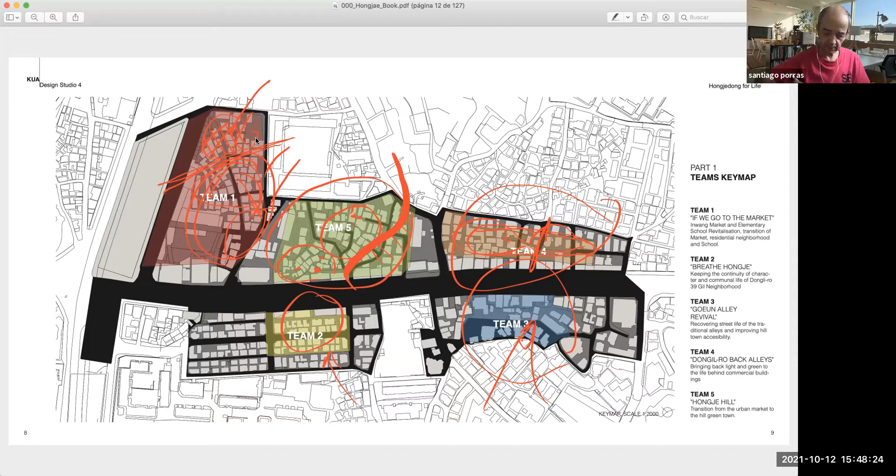And of course, Eugene did very nice work, all in very different styles, right? So I will go first with team 5. I will show you what Seri, Dasol, and Jimin — I think it was Jimin — did in the midterm. You have the result in the book, but you don't have what they did at midterm, so that will help give you more context.

So I will stop sharing this. I will go to Safari — no, Safari here. Okay, so we have a midterm submission. And I will go first with Seri.

So Seri was the group leader, as she is. And that is the whole site strategy. This is something they agreed on together. They kept all the alleys, but some were cut and they just continued, as some of you suggested. And they decided where to put the parking, because this is the main street of Hongje, right, where the subway is a little bit more on that side.

And there was a big danji construction going up there, so we knew this was going to be a very busy street. The elementary school is over there, also will be very busy. So they thought the best place for the parking was over there, and in the other corner, just near the market.

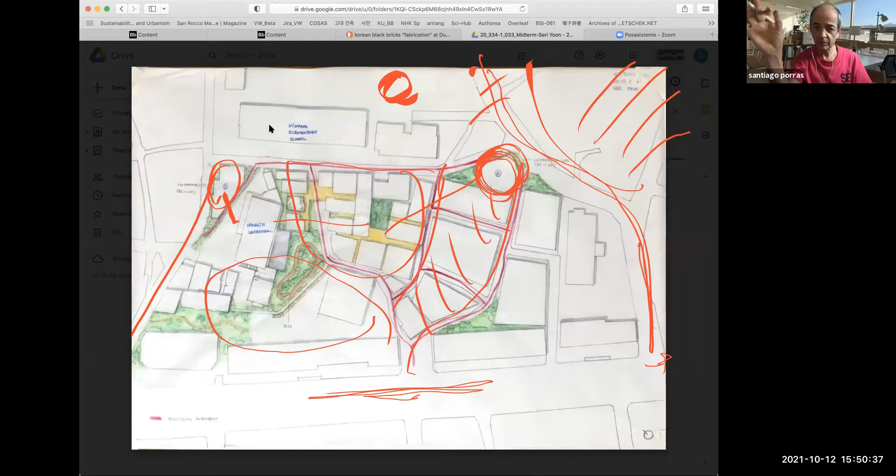Right? So they will have a not-difficult connection from parking to any kind of plot. And then Seri worked, I think, in this area; Dasol worked in this area, and Jimin worked in this area. You see, one thing we did not do so well in midterm — and I include myself — was to show very clearly the before and after. You may have difficulty knowing what was before this, right?

So this was not much more than what you did in the workshop, right? More or less this kind of stage. But you always have to show what was before and what you are doing, so we understand better what is going on.

I don't want to do this. I want to go to the next.

So this was an image that Seri had for the parking with pilotis, which is just an image. In the end, it was not going through, but you have to visualize a little bit what you're intending.

She was working more on the house, and she did something very interesting, but very complicated. Seri almost died in Studio 1, Studio 2, Studio 3, and Studio 4, because it was always really complicated. That's the nature of people, right?

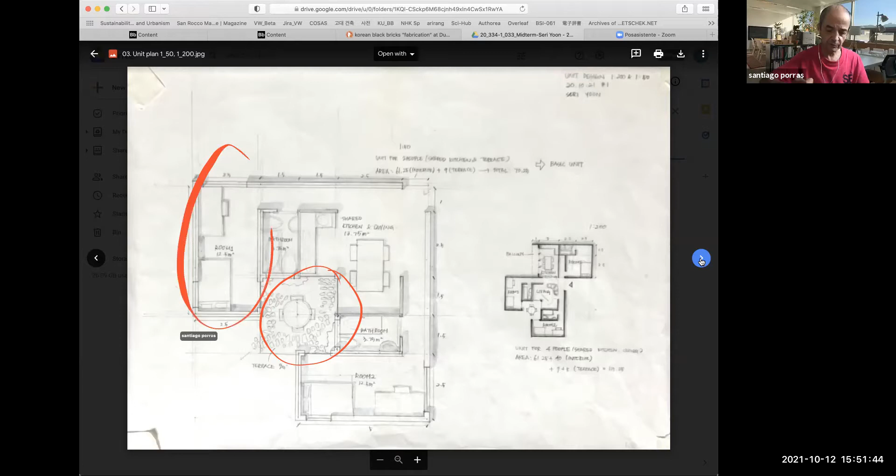But she was trying to make a kind of a courtyard house with shared living. So you had large rooms with some common space and buffer space, which would be the bathrooms, with some courtyard and some exterior space. So you have some kind of independence and nice common life.

And then studying the different combinations to have this be more flexible. So this was the elaborate prototype she did for the first quarter. This is the study of circulation and the independence and so on. And this is the combination studies. And you see, it was mainly handwork.

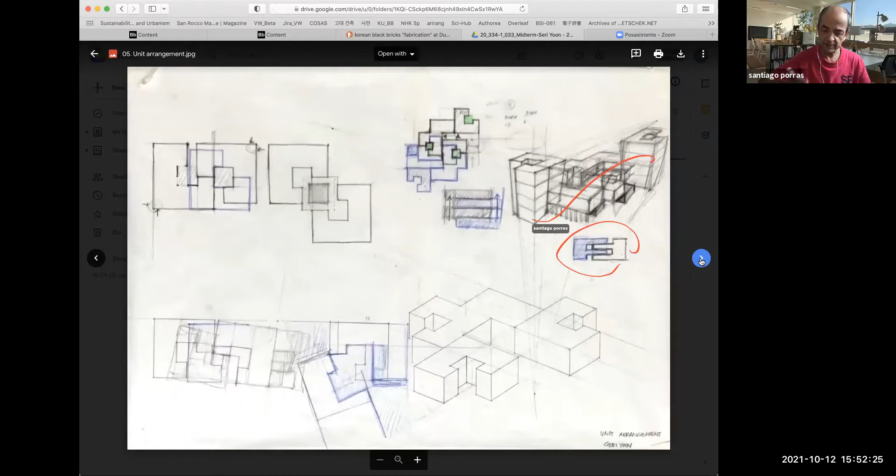Then they all did very nice computer work in the end. You can understand how to work in sections, how to adapt to the topography, how this kind of typology can be combined. The key point was the courtyard, which is something many of you are working on also. But this was already with a very exact size modulation, and some combination intentionality.

So different ways of combining into how to adapt to topography going up, and how to make difference in height and so on.

And then a proposal for the site. Again, this was very elaborate, but once you have the module and the ideas, you start thinking how you can implement it. You see that even though all the students agreed to keep the alleys and the structure, Seri demolished almost everything, which was not necessary, but it's also a possibility.

So there was no hint of the parking. I think Jimin did the parking on this side, and Seri did in the other. But some kind of commercial facilities near the school, because they thought this would be more public street and the alleys went there. A lot of common spaces linking the different blocks, which she had to correct later because it was too much. And then some green in between, which was also too narrow, but still it was a first intention, first view of how to make this.

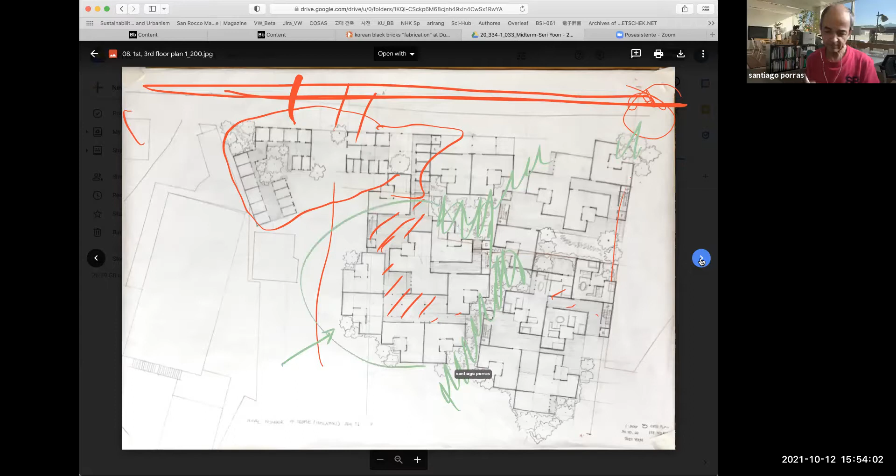And even though Hongje is not as dense in terms of people living in small rooms as Garibong-dong, the houses are traditionally small and very tight together. So working with high density was also one challenge. It was kind of a ground floor, which was one of the required documents, and the upper floor.

And this was the difficulty of keeping those green spaces, but also organizing the cores, stairs, and elevators with the proper distances to each of the units, and the proper escape ways to each of them. Because those cores will need one entrance from the street, so they need easy access. And that has to do also with how the alleys are organized.

You need to have all necessary, but not too many, so you don't spend all the space in stairs and elevators, but enough cores so you don't have too much distance from the units to the escape place, for terms of stability. And again, there was an intention to have plenty of common space on every floor.

Seri studied the Montreal Habitat by Safdie, which had a lot of spaces in between. Then she had to correct because it has nothing to do with habitat, and the habitat was something which was not so successful. So they have plenty of space, but nobody uses it because Montreal is too cold for that.

But well, that was quite well done. Sections, again, you see it's still a bit rigid, but quite interesting combination of green spaces and the units. Interest for the light and this porosity many of you are looking for.

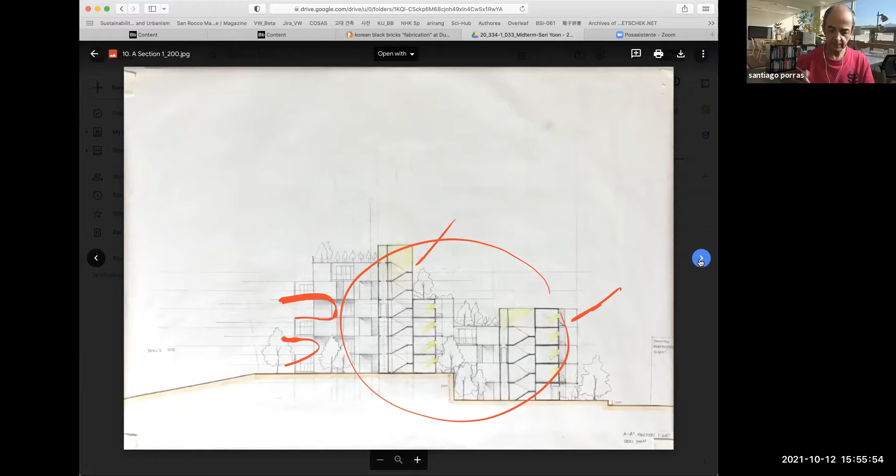And she had to work on softening a little bit the topography. That was a bit harsh to do, but well.

Nice drawing for section, more sections. Again, finding difficult points on how to solve those big steps, and big on how to make courtyards with plenty of light.

Some of them were not working because many of them were like tunnels rather than courtyards. But again, for me, it was quite well done.

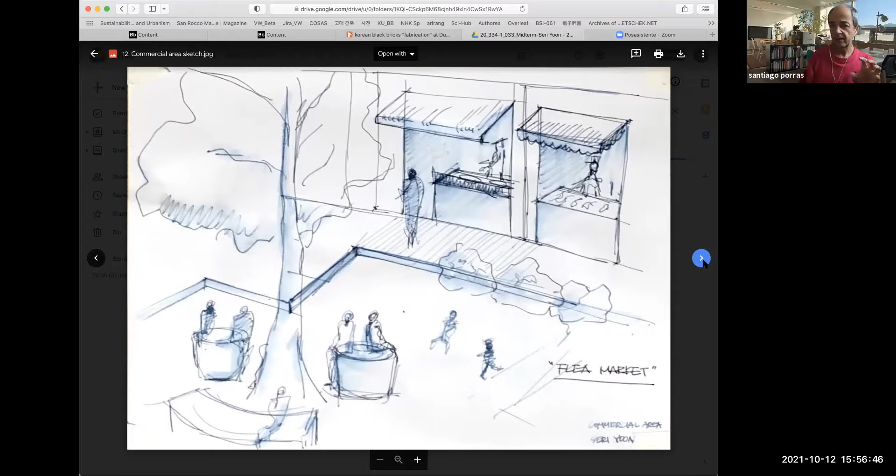And then some image for the market, which was a little bit disconnected. This never came into reality because you have to be careful. It's nice you train with the images, but this is not giving so much direction on how you can implement that in your project. But still, it's nice there are drawings.

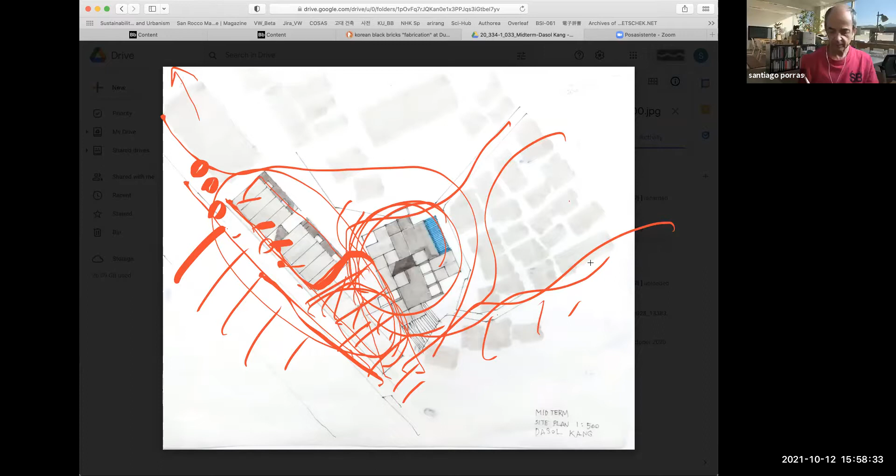It's like two projects in one, but the intention was clear, not defined, and that's all. It's hard working, but a bit more slow in the process. It's very linear. He has a very clear idea, but he was not as aggressive as Seri, who was producing all the time.

Dasol had as a reference Tadao Ando, those hill houses you may recognize at some time. Ando was a bit tricky because it's very difficult to be so minimalistic.

Anyhow, this is the site plan, then going backwards. This is the idea for the ground floor. So there's a big excavation, and here you see the hill. When you have this kind of stepped houses with the hill behind, you always have the problem of what to do with the space under the houses, which he had to deal with. So: shops, marketplace, and some kind of space in between, which he had to define over the weeks afterwards.

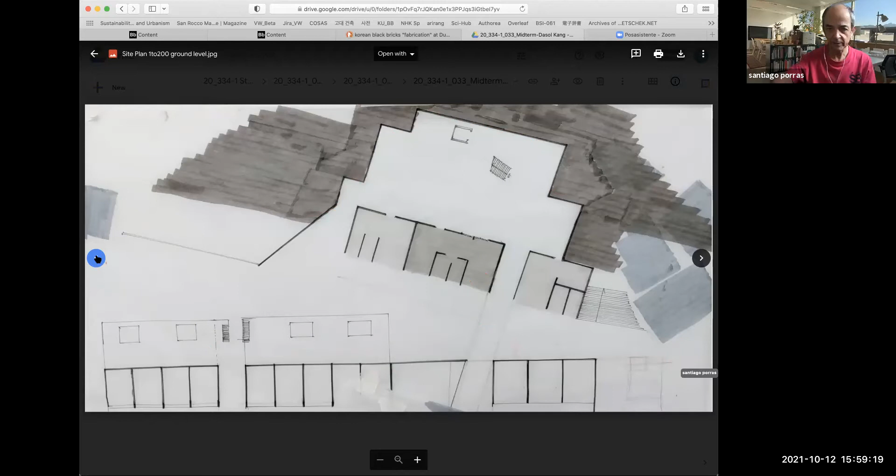This is going up, also defining the course and the steps going to the hill and the access. So it's like going from one stair and accessing the different levels of the star building, then connecting to different alleys of the existing town. In that case, that's always a bit more contextual.

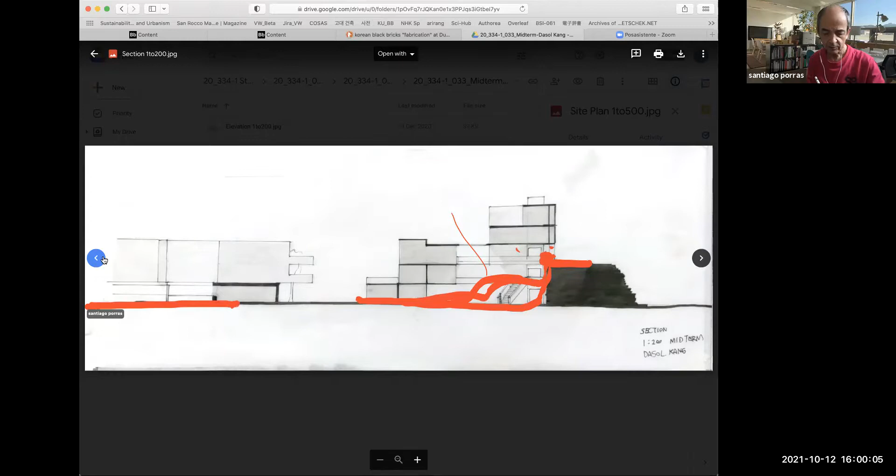Going upstairs, right, to upper floors. And this is the section. So you see, this was too radical. Then he had to soften a little bit and work a bit more on the hill, those connections. But it's like from the main street to the back, and this will continue with the small houses on the back. Again, one interest of this project was dealing with the main street, which I think so far only Group 4, Junghua and Junghyun, are doing this time.

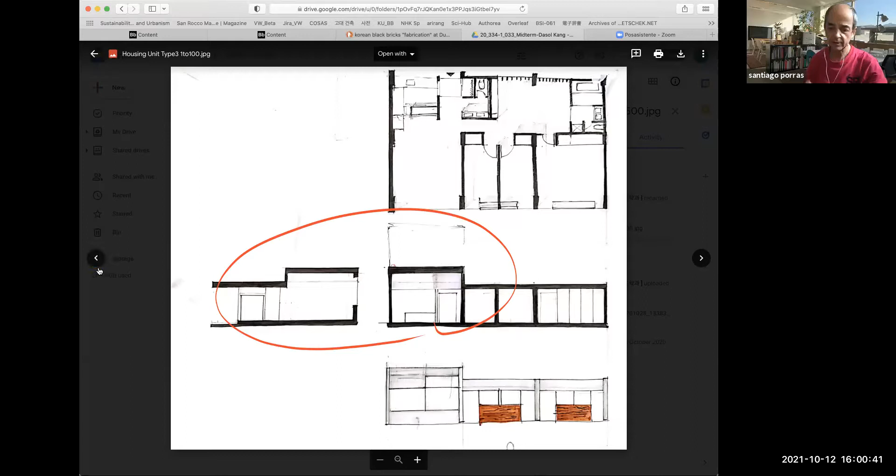And this was his study for the houses, for which Tadao Ando was not so helpful. Also trying to see how he would work with not just flat sandwiches between floors, but having some kind of space differences between rooms, and some elevation study. Oh, smaller units, right?

And this was the basic type he was using. So thinking how it would work in section, actually 2 sections. One section going like this, just this one. Another section going like this, probably. Because maybe it's this one over here. And then some very diagrammatic elevation.

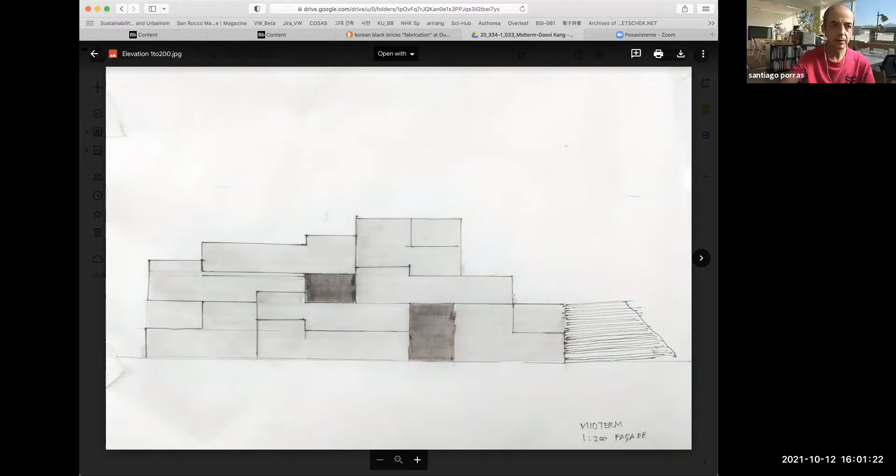In that case, the site strategy was already presented by the group leader. This is what I was telling - this was a group work, so each student then showed only his own project.

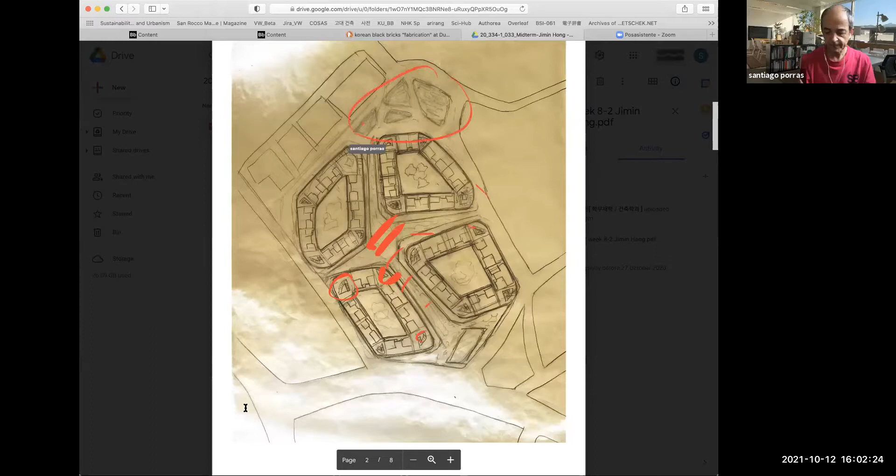I think we have some pages. Actually, this could have been possible, right? It's like having units and having specific points in the corners, giving interesting space between a green area and some common area in the street. Not especially original, but okay, this could have been a nice project.

This is the initial planning for the alleys, giving a bit more connections than before. And this was the house study, which was interesting, but still improved a lot. It's kind of a big terrace, with a common space and then the rooms on the sides with an entrance on one. It's a little bit of elaboration of the usual apartment, but in some original way.

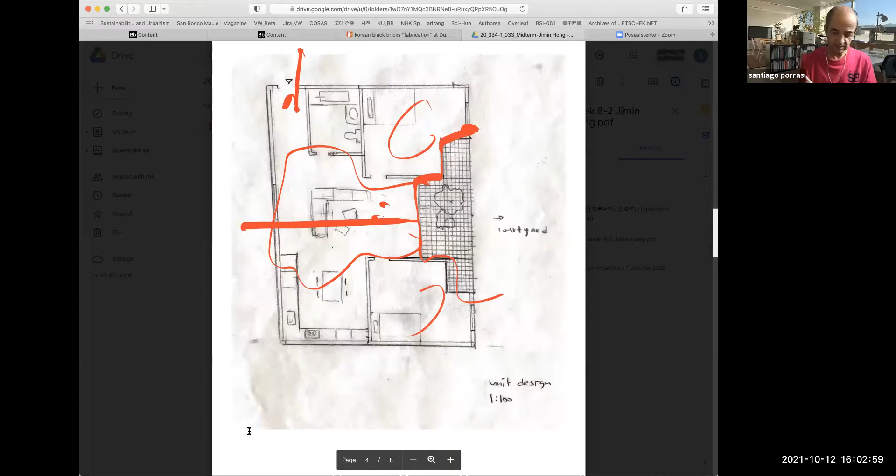Well, the elaboration was much better. So Jimin had to do a bit longer process in this sense. Study of elevations, that improved a lot also. It's very much abstract, and her site was not flat.

That's why those things - and probably those sketches were the most interesting, in which she was trying to recreate that topography. Also, she abandoned and did something different after midterm. But at least she had already decided the main organization and the number of houses, and the typology was going on. She had a bit of difficulty finding the size and giving some kind of personal proposal for housing.

That plan was not terrible, but was not especially exciting. So this was one group.

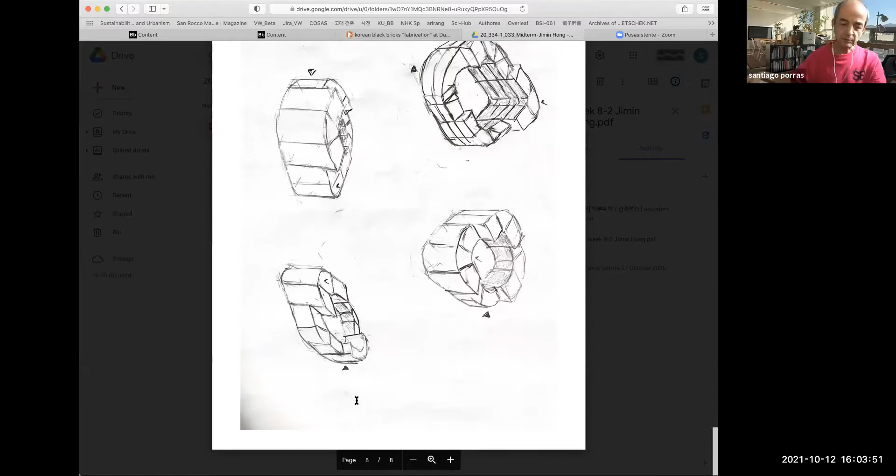Let's see the following group, which was Menli and Maysa. In this case, coordination was a bit worse, and they just worried mostly about their houses.

If you remember, it was a long block. So Maysa was working on one side and Menli on the other, and they also had strategies they worked on very much.

This drawing I put here, especially for Uri Minje, because Menli is really artistic. She draws very well. Actually, she could be a painter.

But as everybody has difficulty continuing with the process because things are difficult and you have to proceed, when she gets stuck she starts making drawings, like a sun study, which after is never used.

And this is many hours drawing, and you don't need to do it because you already have the digital model. You can calculate it, you can do this in a few minutes in Rhino or SketchUp, right? But it's like trying to be busy when you're stuck.

So it's nice, but then it was not so useful because then it didn't work.

This is just because Menli kept all the main buildings to the street, then changed it. There was a church and a new building which she also kept, and she demolished most things in between. This may connect a little to what Junho and Junhyun are doing, not keeping everything on the border, but having big buildings on the border and making a smaller town behind those borders, right?

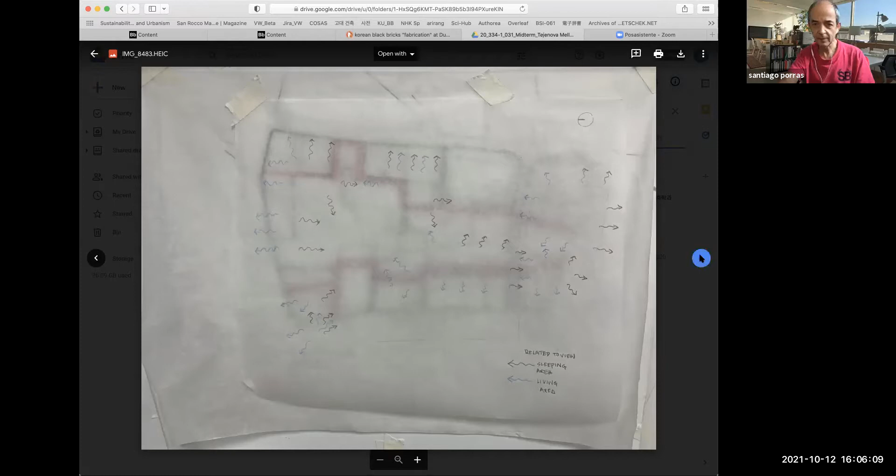Yes, and then organize a bit more. And then the house type, this also improved a lot. Menli is from Turkmenistan. She was trying to adapt Turkmen house peculiarities to Seoul, and improved later, with larger and smaller units with big terraces.

There's something you have to be careful about. When you make photos of the sketches, at least have the camera straight over the drawing and give good contrast. It's a pity you spend the time doing those drawings and then you present them so badly, right?

And this is more interesting, so this tells you about the strategy. This is the existing church with the courtyard, existing villa which she kept, and existing commercial buildings, and then the new constructions filling the rest. And you see the smallest scale of the houses, which were also the living units in that area, right?

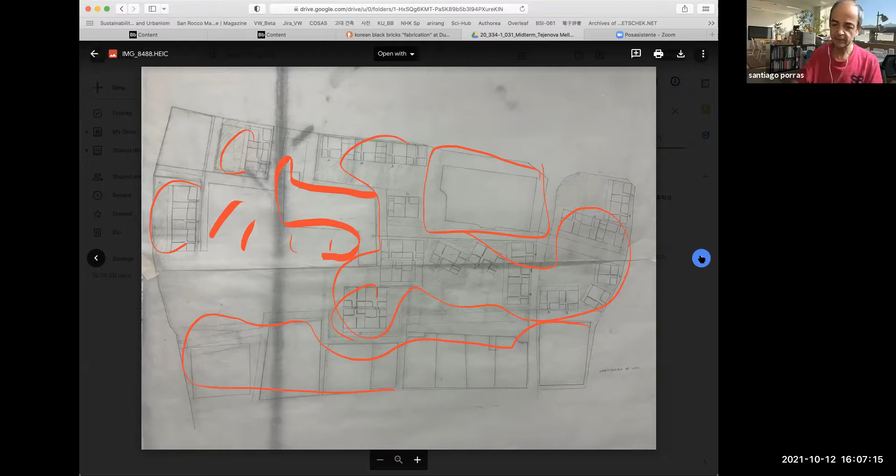This was a nice part, and this is what saved more or less her midterm in this case. So from here, the project developed more than with the sun and shade studies you saw before.

And then some sections—people have more difficulty, never draw trees like that. Again, take the photos straight, but this was not... well, this is telling you about the scale you're working with and what you're dealing with, right?

But still that improved enormously in the following two months.

With Maysa, it was a bit more difficult. I will show all of them. And she didn't even organize things.

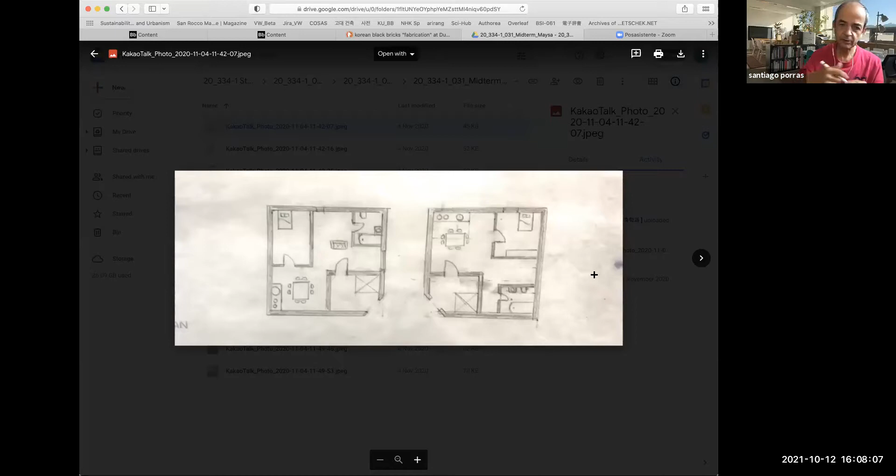So Maysa did also her housing units, in different ways. She tried to give isolation, which was nice, and worked on the elevations from the side.

And then the combinations—the area of Menli and Maysa was much flatter, so they didn't need to work with topography so much. Maysa was working on having large common space between houses to compensate for the minimum space of the houses. But those houses needed a lot of work afterwards.

So don't look very much into the detail.

So she studied all combinations of floor plans and so on. Some elevations, and this was part of it.

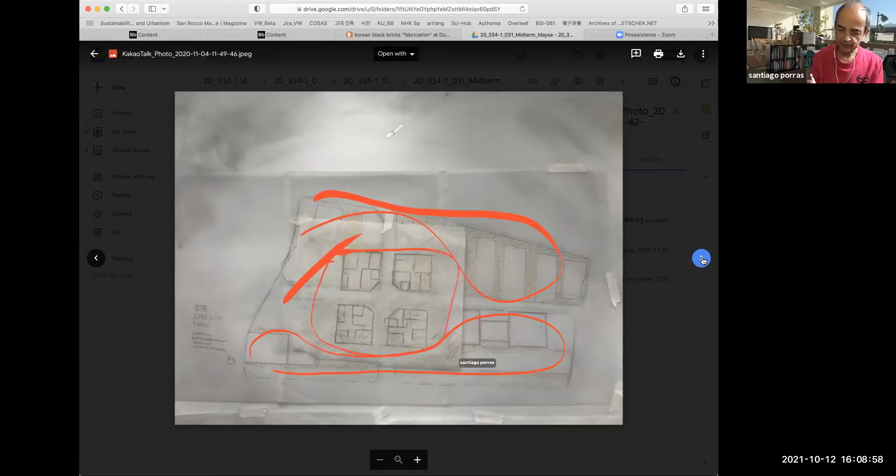So again, Maysa kept most of the main buildings. She's just working on a crossing, trying to make four houses or four towers in that area with some street space, right? So you don't need to be as ambitious as it was, for example, with Seri, who did a totally new town, right?

Or Menli, who really did a lot of housing spreading around. Probably Menli was a little bit similar to what I spoke of in group 4, but the marketplace spreading around is a different strategy—of elements just moving around the different areas, right?

But other things were very much specific, as the solution was not so expansive, or in this case, Maysa's. So anything's okay provided the proposal makes sense in terms of housing, also in terms of improving the city.

Let's go to the following group, which I think is... I will erase this. Better now.

The group of Soy and Hwanhui.

I don't know who presented the site strategies. Probably here, I have to go backwards. Well, when you scan, it would be nice if you put the scans straight, because otherwise we have to see them sideways.

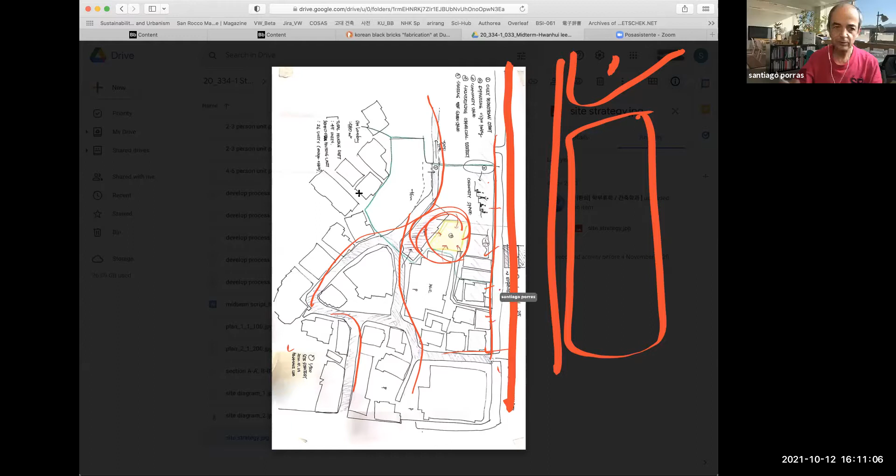They preserved all the alleys, and they said a little bit what they wanted to do, which is pedestrianizing, creating open spaces, and they worked on the front also, and also proposed the renewal of one apartment house, which I don't see clear what is here. It was an existing apartment which they included in the whole project.

Again, this plan is important, but the issues and strategies should be clearer. In this plan, we have small errors. I think it has to be a bit more evident, and you have to show the existing and the new. I think this you did better, but still not totally clear. So there's something which we improved.

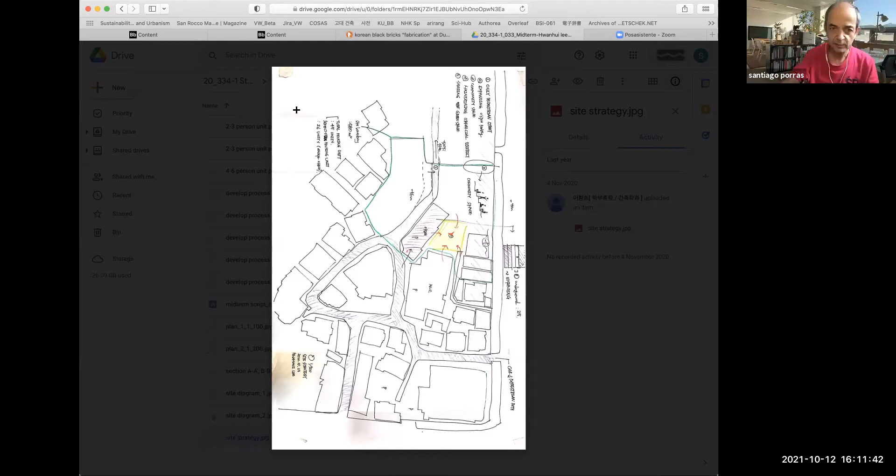And this is already the on-site, the existing open spaces, the circulation study, and then the sections. You see, in this case, the topography was brutal from the hill to the street. And this was the front of the street.

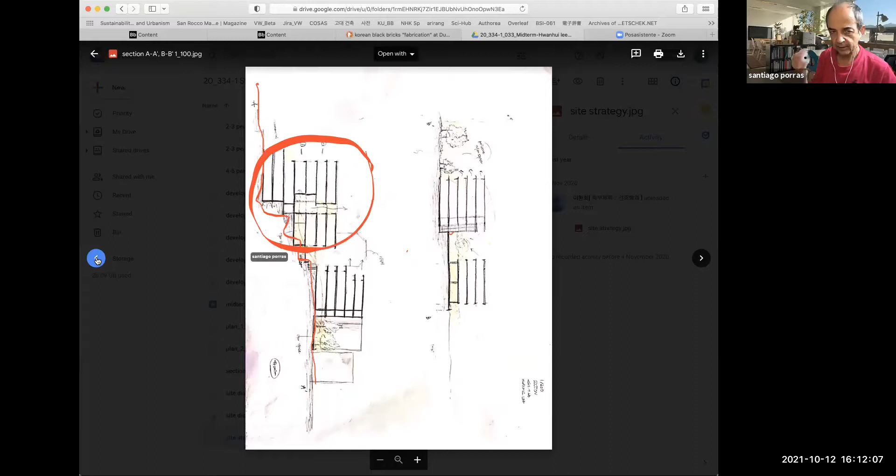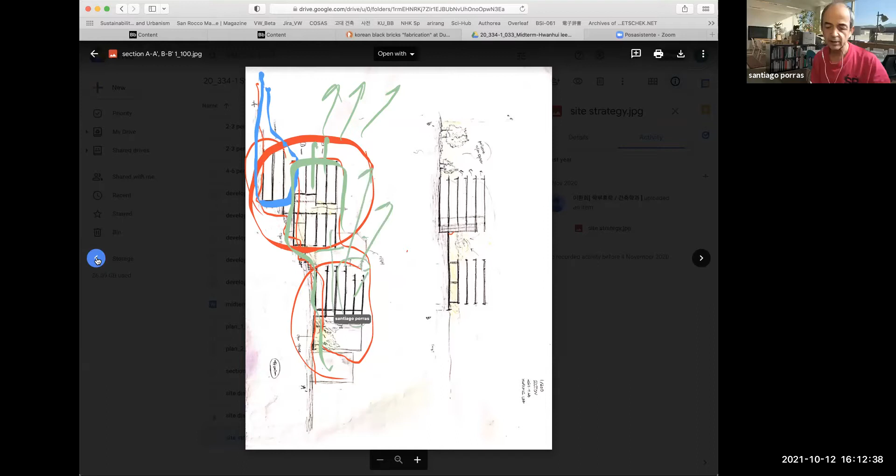Again, the same as Tassel did, tried to make a connection between the housing, so it's commercial and then housing continuing to the hill. It's kind of overlapping between the very busy street and commercial, to the more private housing. But still having some front, even though it's noisy, you have a very nice view to Inwangsan and the mountains. This also helped to have quite a few views to most of the houses on the back, not all the houses, but quite a nice view.

There was a problem of scale. She had to work on it, but as always, this is something that comes with a bit more effort and time.

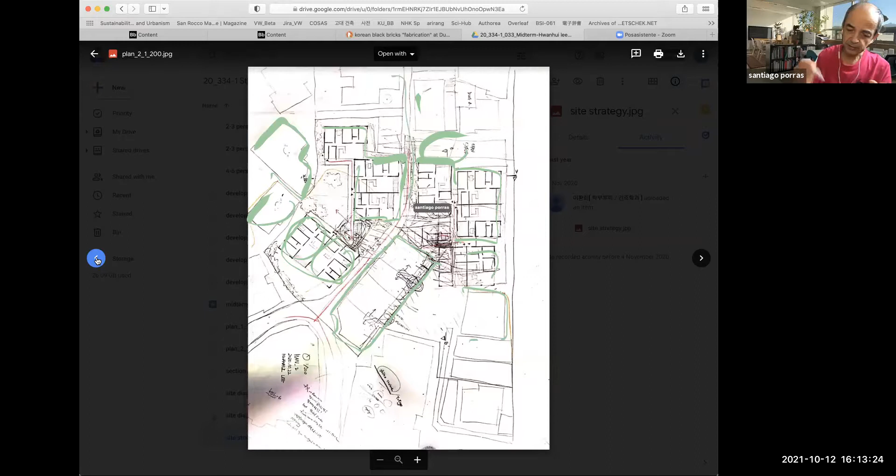I went too fast. So different levels. One difficulty here was to connect to the street. And here also they put the parking from the street, not from the inside, so you don't need to cross with cars all the time, only with the emergencies.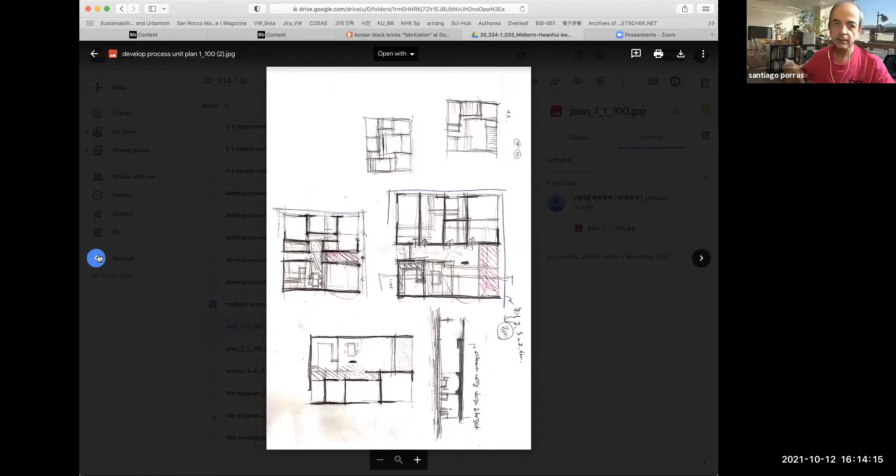So the keyword was a lot of veranda outside, like a double layer towards the street, which was, I think, some of his studies was about. And that is the different ways of doing that, because that also went through section studies, and also how to deal with the section and different floors of that layout.

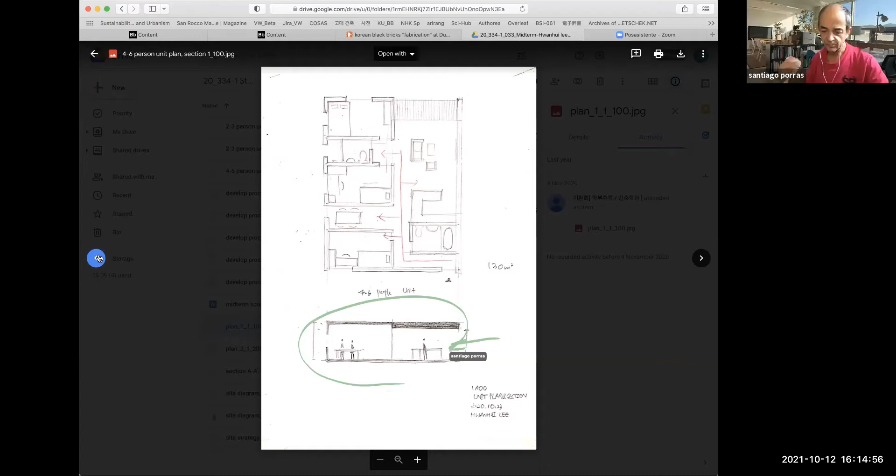Then we have Suyi. I think we go backwards. Okay, so in this time we could do it offline, so we did the presentation on the studio.

So again, this is the main street. We have a hospital here, I think it was the hospital and some commercial building. So the problem was connecting to the street, otherwise you have to make a long way to come to this side. And then this is the continuation.

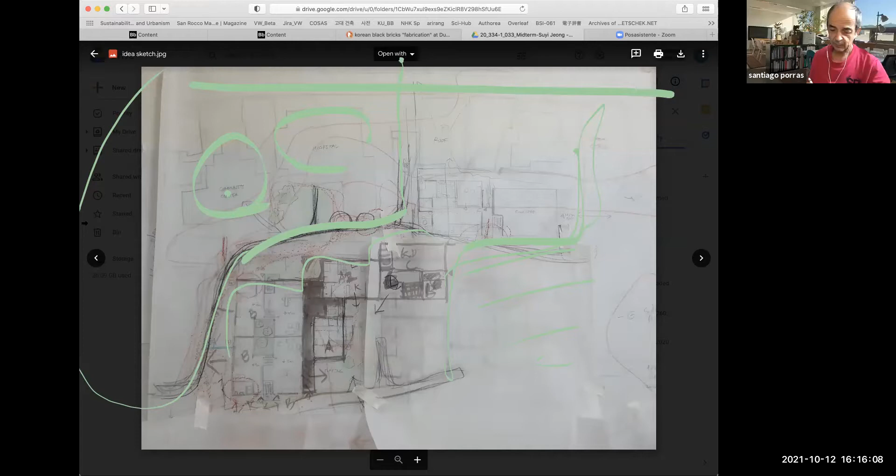I think Hwanhui came up till here. So he had a different type of houses. They were trying to keep a similar scale, and they were working with the same alleys continuing. And they divided also where's the parking, where's the accesses, and so on. They had to do it in combination, strategies and so on.

So there's the full site. It's a pity because we don't have so much, but you can see the different types in the visualizations of that proposal.

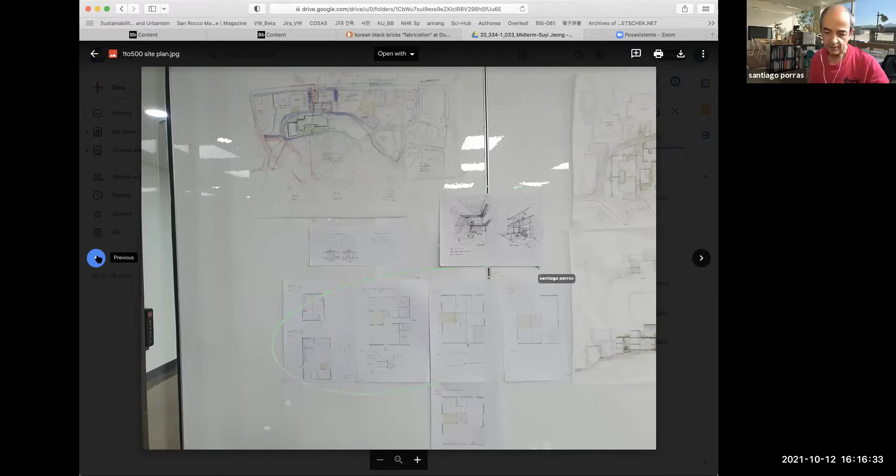Yeah, okay, so the sections were a bit more controlled than the ones of Hwanhui. Hwanhui had a harder time, although this approach into the street was also difficult. But the typology Suyi was using was more based on Hanok, which is very tough to make on a multi-floor. But Hanok had a very nice scale, so she could take out and in and out bits to have this kind of combination, and then with time that worked well. You can see even in that small sketch that it just starts getting interesting, right?

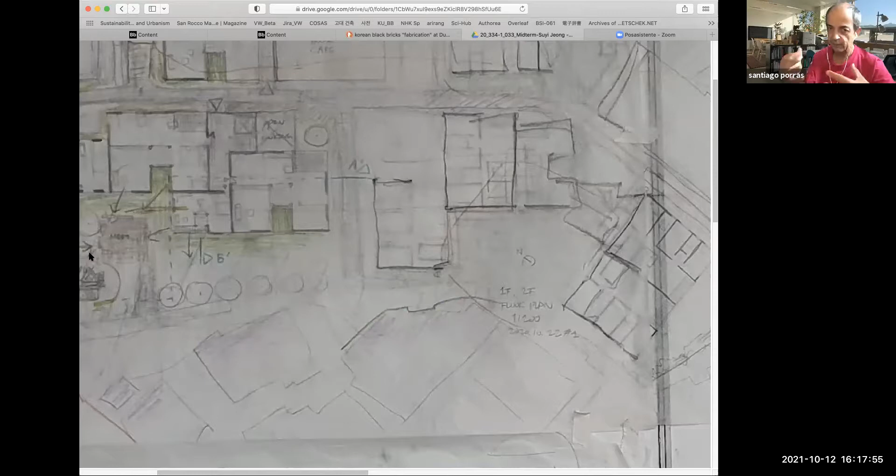So I think this is the border between Hwanhui and Suyi, different houses. They also considered each other's work, so they knew how one building affects the other and how they create open spaces in between, which benefit all of them. We were also very aware of the existing buildings, so the open spaces were in the proper places without disturbing much, improving the conditions not only of the new construction but also the existing buildings around.

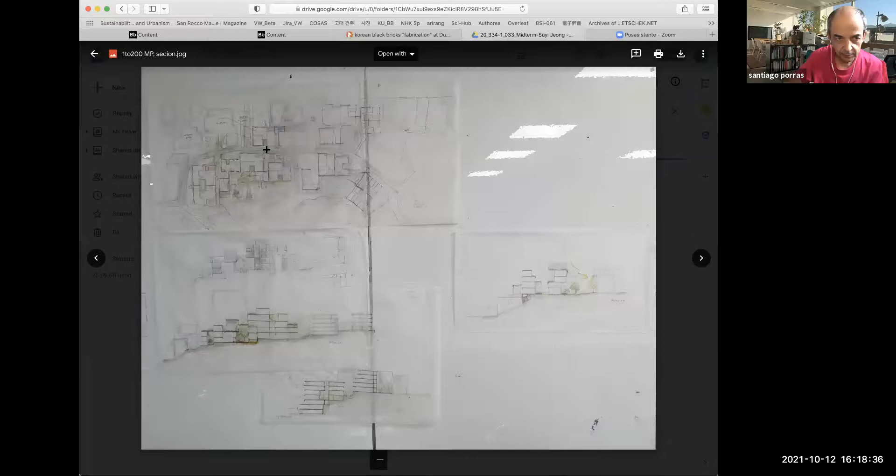I think we showed everything. So the section that we see on the plan - okay, this elaborates better, but we have an idea of what is going there.

Then we have the group of one, Eugene, which didn't upload, so I cannot show. She did very nice work, but it was slow, a bit more contextual than the others. So you can see it in the book.

So let's go to the last group. I think Yechan did the strategy.

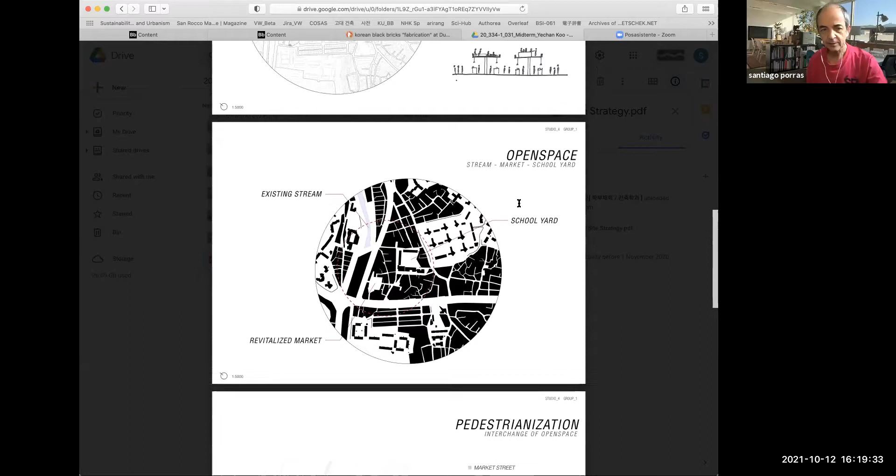Okay, this is a full presentation about what exists, the plan of the market, the idea of making the market integrated into town, the open spaces. This is the new Danchi, which is already finished, which affected our area. And the strategy for making the streets pedestrian.

So the idea was to keep all the alleys as they were. Some sections were more Yechan's work, but some of Jechin's was also following this, how to work in section for those streets. This was for the group. Actually, this was Hemin using the existing Eugene mansion as a main parking for everybody.

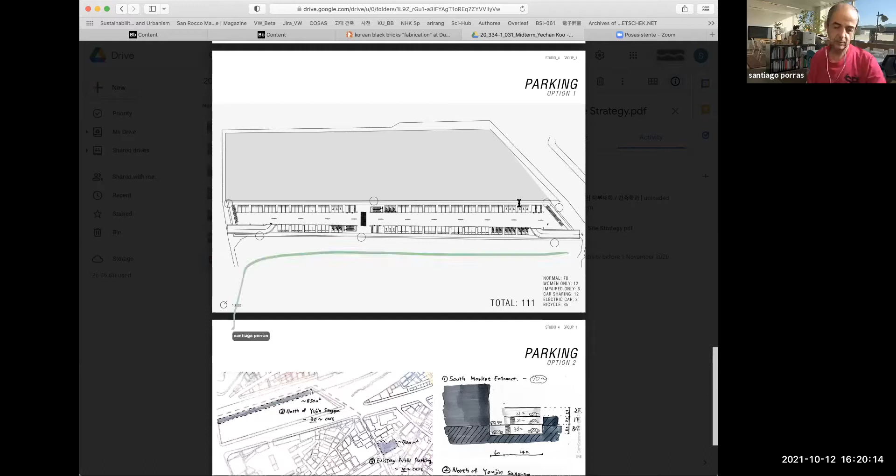So the site they were using was the other site. Or was it - no, okay, this is the plan. So we were just in this site. They proposed to make an underground parking in this whole street, so cars could come in and out without needing to disturb that area.

So there was already a big proposal for it, and it was not difficult because this was already excavated. We have the excavation for the river under Yujin Mansion, so probably it's not so difficult to make one floor of underground parking. That would make all this surface pedestrian, and that would integrate Yujin with the existing market and the housing, so you don't have a cut. Right now this is not a very busy street, so you can cross.

But okay, they didn't go beyond that. So they said this is much more parking than we need. It's possible to make, and we solve the parking problem. We can make everything else pedestrian.

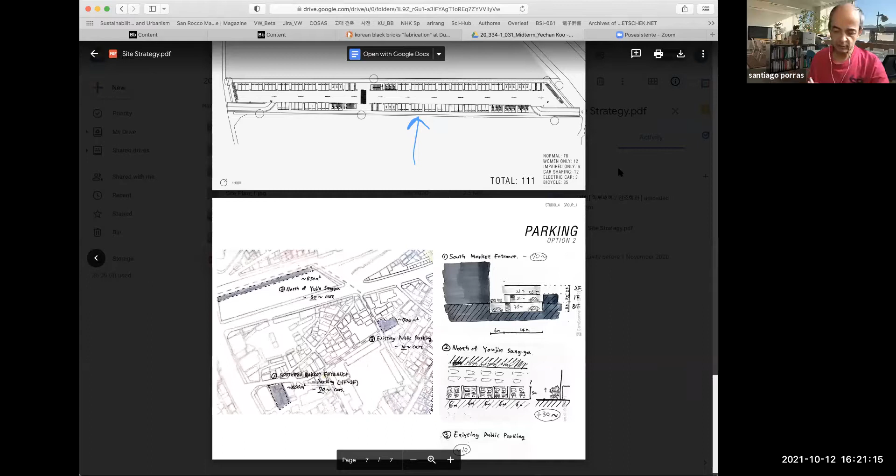Actually, they did one more parking around, which Jaejin solved in his project. I think we showed before.

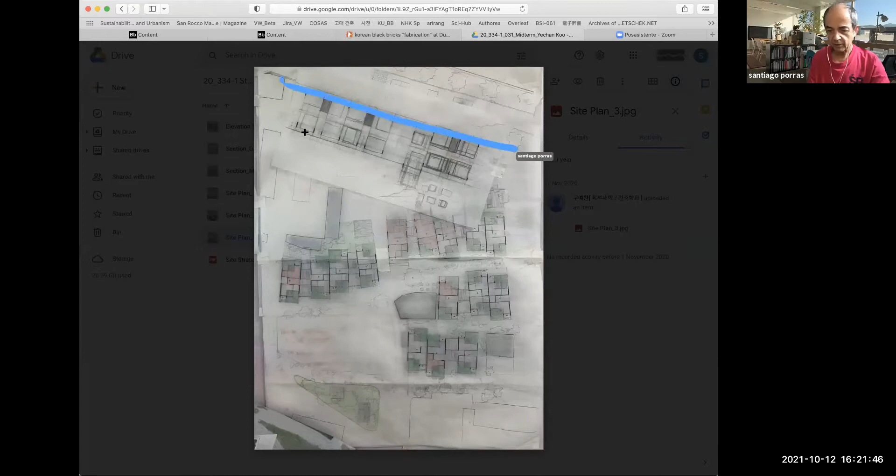And this is the proposal of Yechan, so it's by floors. Again, Yujin Mansion is there, so he created new buildings. Many of them were kept. The market is on the left. And this is the house, his prototypes of housing, which was already organized. Near the market, he had a marketplace in the lower floors and housing on top.

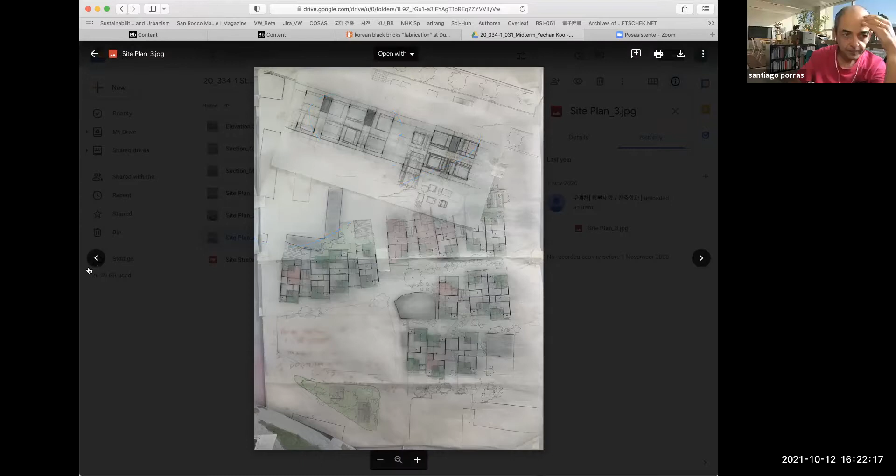It's like a multi-layered proposal, and as you get near the school, they become more residential and more porous, with more green and less market between buildings. So it's the third floor, second floor. Here just integrated Yechan's buildings. Market is over there, I think.

Again, here they had to talk to each other to know what we're doing, so they knew how the buildings of one student would affect the buildings of the other. And they agreed on how to put the terraces, the greens, and the openings, and so on. I think this is the ground floor, and some of the section studies.

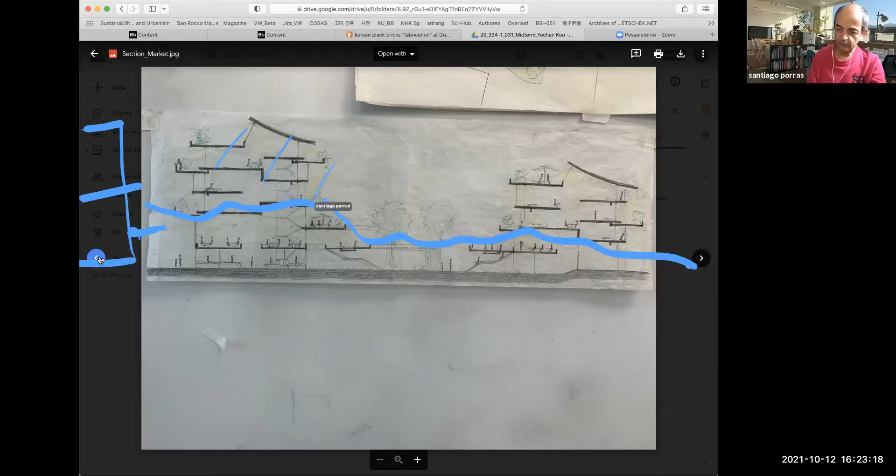So it's like this scale down afterwards, like a large scale towards the Yujin Mansion, which is a big building. There's more space with the market space, public areas, and on top more and more public housing with quite interesting interlocking of space. Yechan used a very, very sophisticated housing design.

But this was one of the few who tried to integrate a commercial, revitalize the market space. Of course, there's not only market, there's a lot of public, everyday common spaces for the neighborhood use, right? So integrating these kind of public spaces with the housing on top, without needing to make a house and then public programs in another place, making this kind of more compact traditional city.

Actually, Yechan was one of the few who was very interested in the 1970s apartments, which had actually 2 floors of commercial and then housing on top of it. Yujin Mansion was one example of that, right? But there were more, and that gave a very different feeling of the space on the street. So he was trying to elaborate on that without copying those typologies, but continuing with that idea.

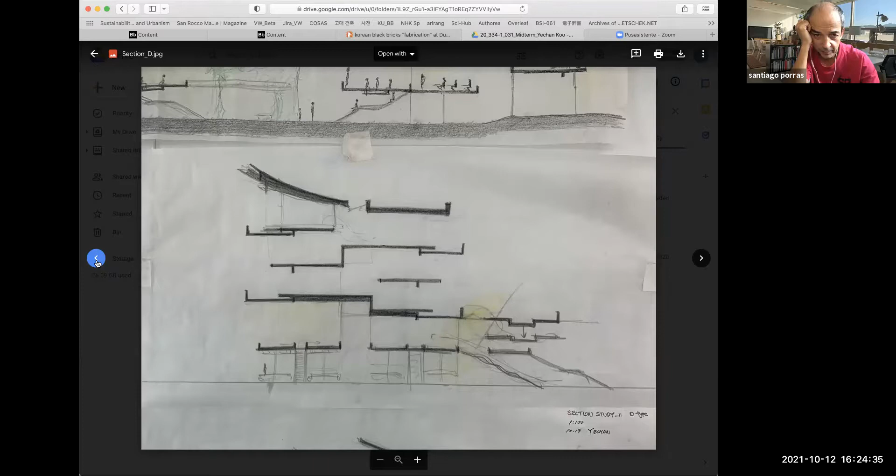And this is the detail, already thinking on the structure and the elevations. I think he had some floor plans, which I don't know why are not here, but okay. One of the few who also gave an image of elevation, right? And how to integrate this kind of commercial space with the houses on top. And again, keeping the scale of a small town, kind of humane, not this kind of huge apartments or endless slabs, which are very mechanical in some sense.

And then we go to Jaejin.

Yechan's reference, I'm not sure. He was working on the old apartments, and Yechan had many references, so I couldn't see who was thinking about. Of course, he went into Hertzberger, the Dutch, and Van Eyck, many others, but it was not as clear as other students. And I have to see Jaejin, probably the orders from the beginning.

Again, Yechan gives the main strategies. So here, Jaejin is speaking of his specific site, what is in the area. And you see here, speaking already on the existing units, so he would make the houses.

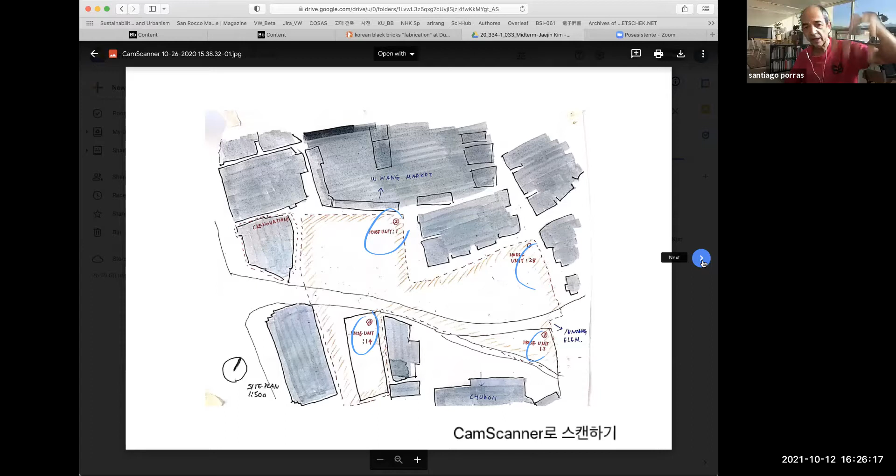In this case, we were careful, as we are now. We tried to make at least as many houses as units as there were before, but also keeping at least as many parking places that existed before. And then additional parking we may need for new programs we create.

Just a second, I have a visit. Just a second, I will close the door.

Okay, and you see, this is not great, but those scans are nice. They are straight, they are clean, they're not perfect. Jaejin could have cleared some of the dirty places and the cell and so on, but still, this is something we can look at quite nicely.

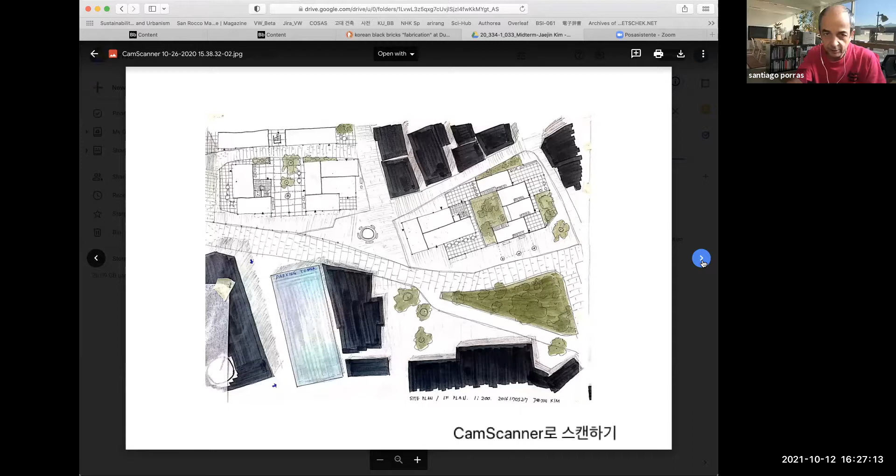And then this is the idea of the ground floor with the street and the common spaces, the existing buildings. And then his hard time studying the houses with the connections and the interior space. Interior elevations are important, and he was working at 1 to 50 almost from the beginning, in order to avoid the abstraction of just putting walls, but really getting the feeling of how those spaces work and feel in reality.

So planning at 1 to 200 and 500 is perfectly compatible with studying small areas or the unit spaces at 1 to 50 and 1 to 20, even making models of those units who are working. So it's not the abstraction of just telling we have one room there.

Okay, larger, smaller units and how they are together. As everybody having a hard time finding how to put elevator, stairs, and the common space and the access, right? And the green and so on. And also how this will have to do with the other buildings we have in front or facing you.

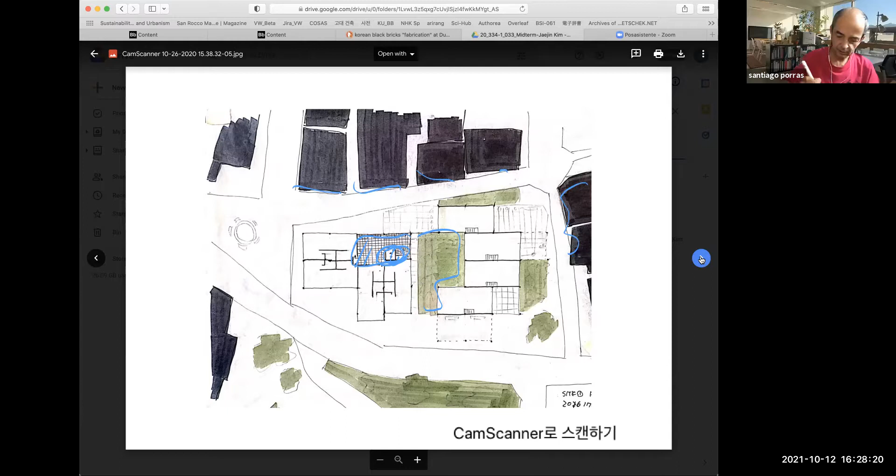On upper floors, again, look at the study of those common spaces, right? With one core, and then we have 2 cores for safety. And providing, as we say, some common space, not only the house, but some kind of common spaces around inner courtyards, a bit more private than the green you give to the street.

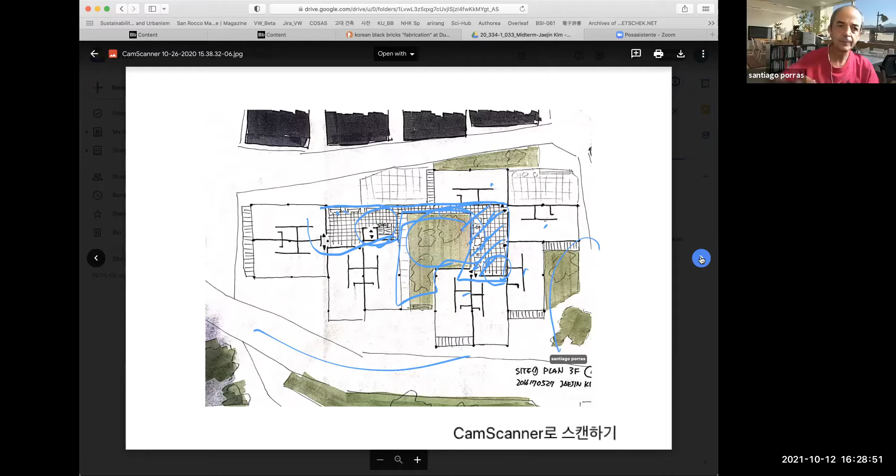So if you look carefully, there's a lot of thinking and a lot of care in those proposals. And then, well...

Jaejin studied all the floors. Some people did just some basic floors and the sections, which again were quite hard. But the way of solving hard things is working them from the beginning, little by little, and then you can improve.

Interesting, given the context, we have a large building. Probably he could have given a bit more to the street, the position of the elevators, stairs, and so on. This is why you need to study these assemblies and the proper site where you are, right? And see what you can do.

Jaejin had two areas he worked on. So he had actually two projects of the same kind of typology, but two different assemblies, which was interesting. So he tested his project, his idea, into different places.

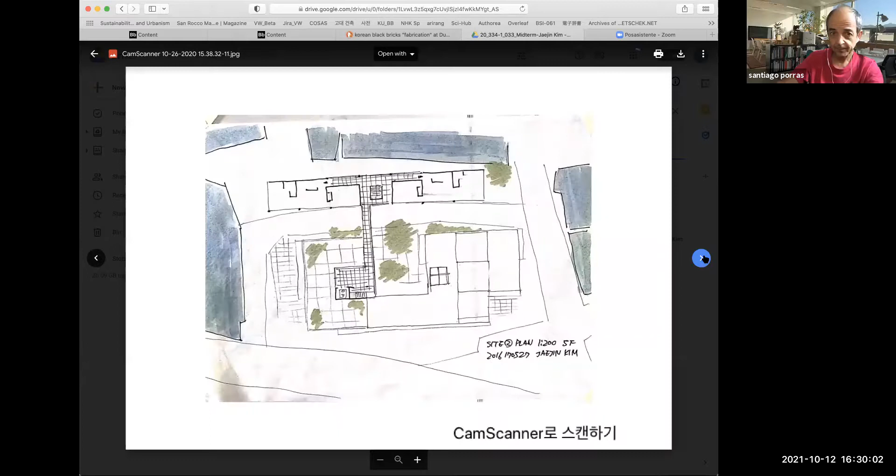The floor plans and then the elevations, which he tried to follow the traditional look of the houses there, but then it was difficult to be consistent with the other elevations. And then little by little, as we commented at the beginning, he actually, Jaejin, we saw much in detail what he did along the semester to prove that.

But again, you need to start here. So you see the problems and you start taking decisions on which direction you will go. Jaejin could have been more contextual, or a bit more modernistic or more designed, right? And he chose a different way, he was a little bit in between. But here you have different possibilities, and the moment to study them is now, of course.

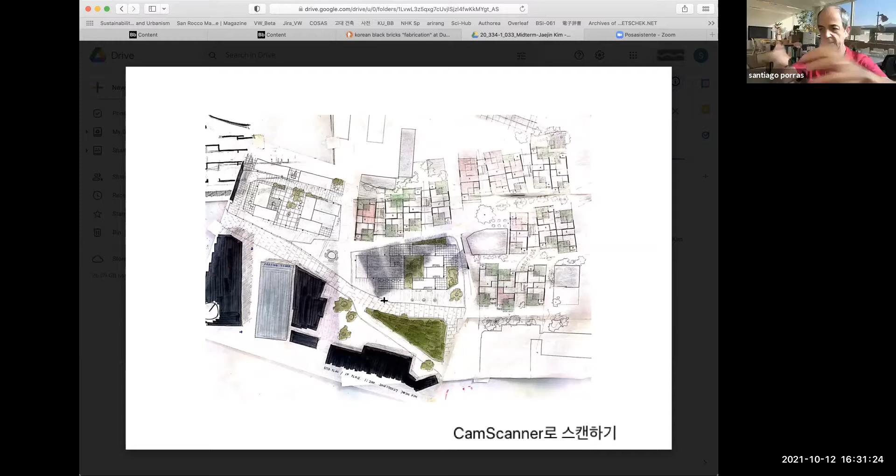So it was Jaejin, and then I think the last we have to see is Hyemin. Hyemin Na.

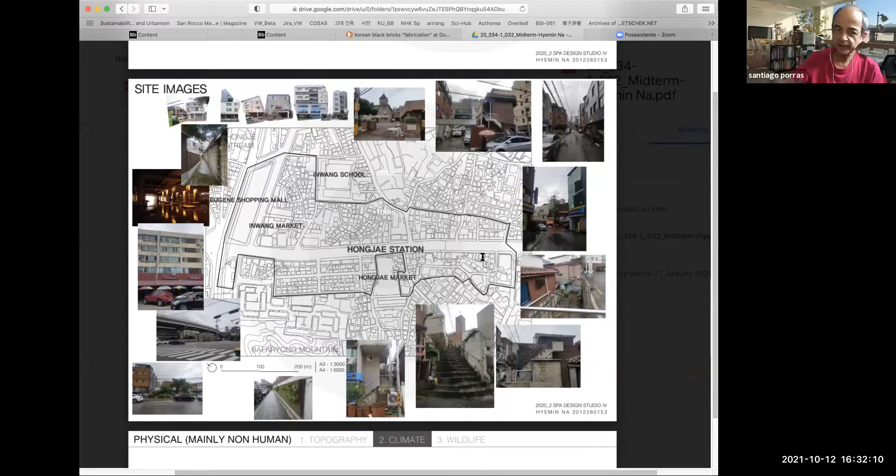A very well organized PowerPoint, the whole site. So he gave his own vision of the general study. He included the slides of the group work he personally elaborated. Right, so he just put temperature studies, seasonal temperature,

the water areas, again, the program, and this is the specific area. So you see, we had about 5,000 square meters per student, which is more or less what we have now, and it worked quite well. Doesn't mean we need to be larger or smaller, can do more or less, but it's an area which allows you to do something complex enough to have a challenge.

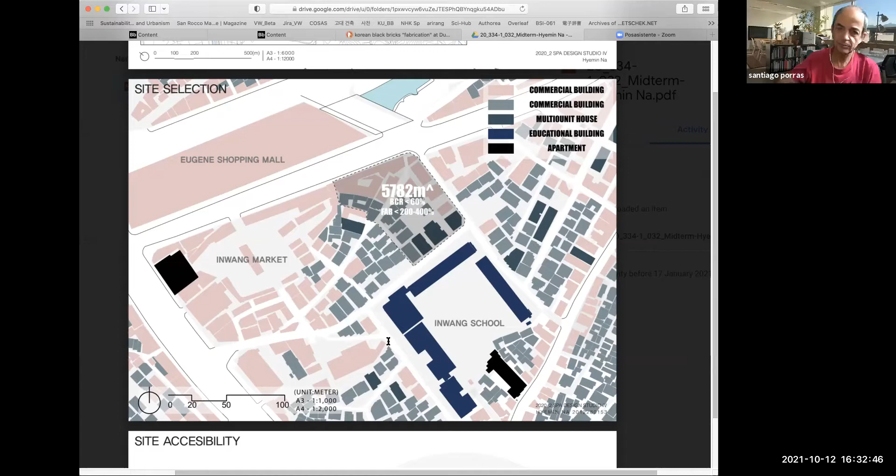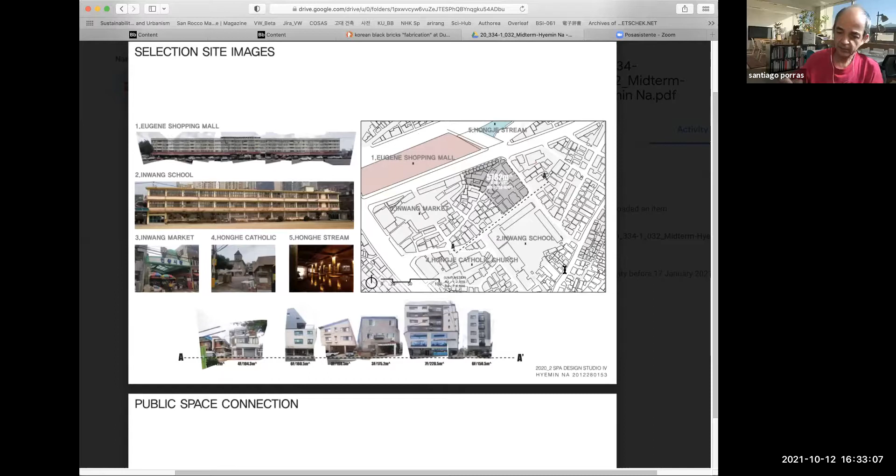Then the accessibility by walking, subway, the road movement, car movement, and then the images of the site. And this is already specific of his own site, that's what he had around. So the school on one side, Eugene shopping mall on the other, and then smaller buildings on the other sides. So this was quite a difficult site to work with the context.

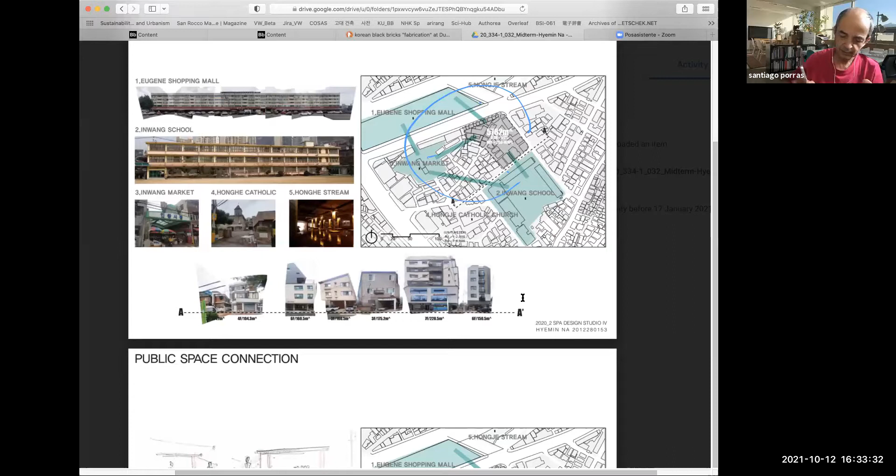And this is already his own strategies for this site, right? How to implement this. So this is not any more group work, this is already individual work of him in. And they start having visualizations of his ideas of specific areas. Some diagrams. I will erase my scribble.

There's some visualizations of what the intentions were. So this is the parking between Eugene Mansion and our site. Actually, it was him who studied the parking himself, so he got the credit for it.

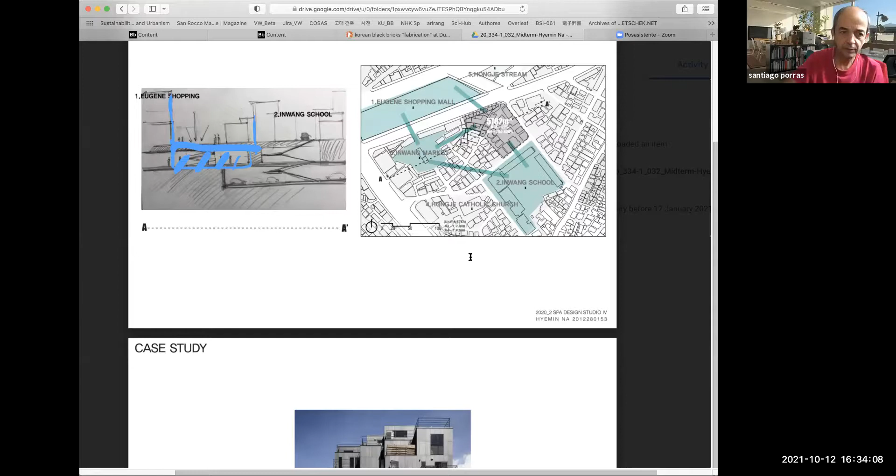Then case studies. And in case studies, there was one weak point. Because it's not the same to get inspiration from Aldo van Eyck, or from Hanok in general, or from Mies van der Rohe, than from a nice but just average Korean office. So this is a nice thing, but it's not by far as interesting as, for example, the Montreal habitat, right? Because it's very much having that appearance, but in the end the project has not so much elaboration inside.

It's more just the outside appearance. So when you have case studies, you can say, okay, this is an image, this is something you might aim for, but you have to go always to the best projects ever of the best architects. You will learn much more, you will have much more information. And that, I think, limited him a little bit. Hyemin was very much going to recent developments, but recent is just recent, it's not always better. It doesn't mean we cannot use recent developments or recent projects, right? But just getting to the nearest because they are newer is not always helping. You have to get the best ones.

Okay, so this is like a case study, and you see there was not so much to analyze. And if you see, well, this is not a bad project, but it's not so great either. It's quite a common thing. And then he just ended here.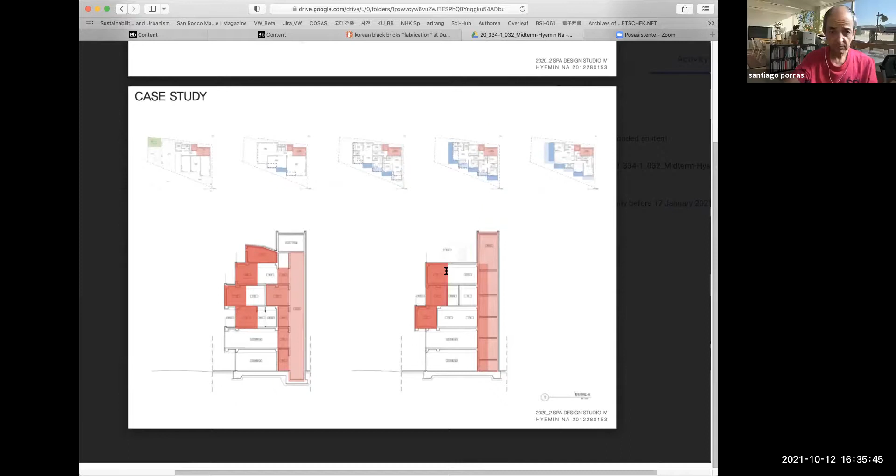So when you're slow taking decisions and you accumulate much material, right, then you have a limitation of time also to develop your project. And Hyemin worked mostly on computer. The problem with computer is that you have the temptation to make a finished proposal soon. So actually he made one new project every other week. And then he had a nice project, but it's like a crazy amount of work. Instead of having a logical process of planning better, giving shape little by little, and finally deciding on how you get the final output, right?

You don't need to make things by hand, but when you work by computer, you have to also be aware on when your project is good enough to elaborate or not, right? This is why, for example, Hyemin, when I started doing 3D models, that was nice, but it was enough to see that it works or not.

It's not that you already have one project, and probably you spend too much time modeling something which isn't so worth it. The case with Hyemin was that he really could have made like 3 studios in one semester, because in the following 2 months he made 4 different projects. Of course every project was better, but if he had worked on the same idea with more continuity, surely the result would have been better with even less effort, or at least the same.

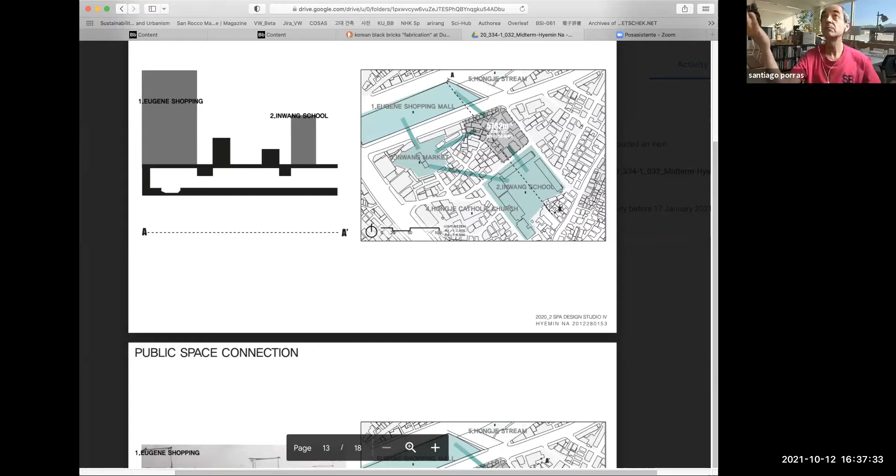This counts as a lecture, so we'll see what people did. I can show you, you have to look for them. I had one student of 5th year who did a project in Garibongdong facility back in 2013, but I don't have those on my computer. It was a really good project though. Let me see if I can find it.

So we were working together in Hongjedong, my group and Professor Sonryul's group, and they did very nice work. They worked more contextually. They did many works on Eugene Mansion. On purpose, we didn't want to renew Eugene Mansion because we did reuse in Studio 3, but Yunjong did a really beautiful project. Let me see if I find it.

I can show you only the result. Let me see if I can go. I have to find it.

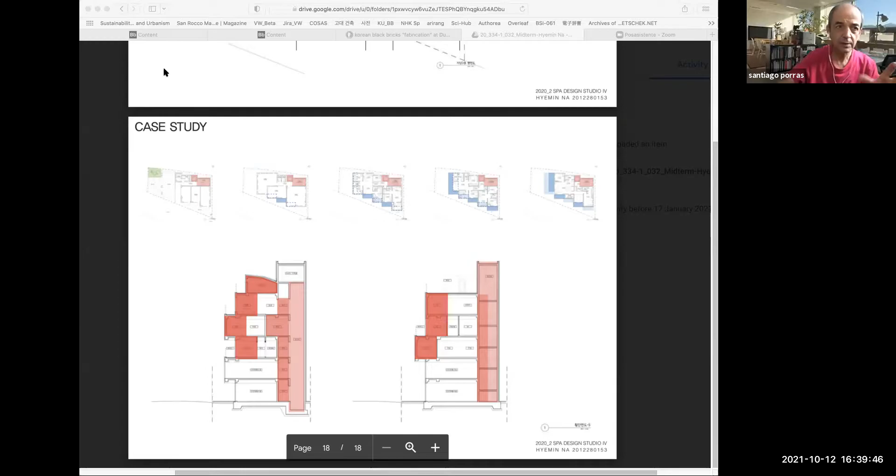Stop sharing. I will show you just a little bit of Yunjong's project. It was a group project with 2 students, a reuse of small houses, and I think it was quite some of the best. Actually, the cover of the book was that project. Okay, Han Yunjong and He Jongdong.

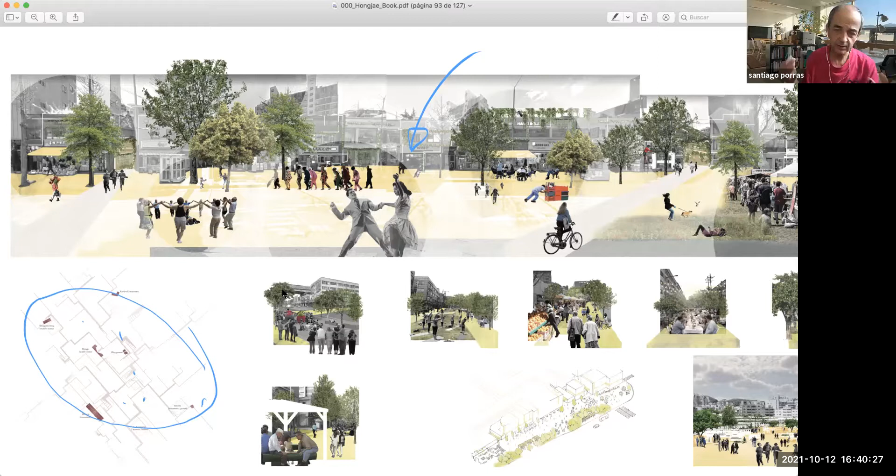One thing they did was working in, well, it's a bit loose, some of the old villas. They just reorganized them to renew them and make new spaces. This is a nice visualization by collage, probably a little bit too much, but it's a good way to visualize without needing to make a huge amount of work on renderings and so on. There's some view of the streets and the small villas which were renovated.

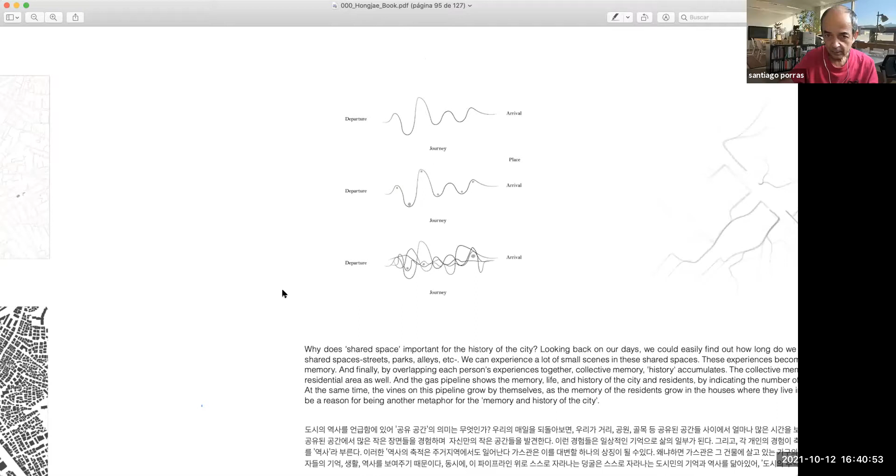Again, they have studies of the site in different ways, and some of the movement graphs and other studies they did to start working.

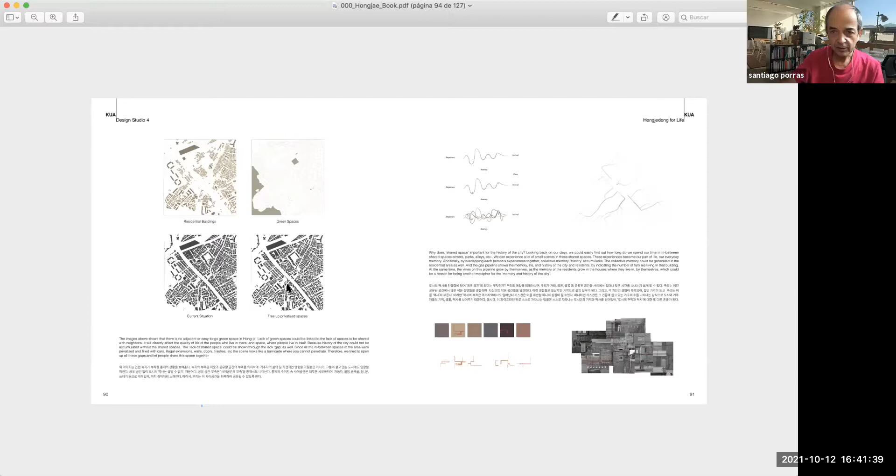Let me erase things. Then an idea which, okay, they were very happy with, but maybe they didn't need it. One thing that is very shocking or very expressive when you go there is the gas lines—that happened also in Garibong. So this group used the gas lines as a kind of symbol for individuality, but also for community. This became kind of a motif of design in the project also, which was interesting, but probably a little bit forced. But okay, this was it.

This is the plan of the proposal. They worked in the same area mostly as Eugene did.

And this was the elevation, so the existing—they did the drawing of all existing mansions with the evolution over time. They showed a structure for green to cover it, and they showed over time how those elements would change, not only with the green, but also with the usage. So this is very much the timeline strategy that we've commented on many times, and I think quite well expressed—without demolishing, just taking out something which isn't in good condition, or making small changes to get a very attractive and new place for living.

And of course, a very attractive site plan. There were areas which were not supposed to be touched because they were out of the area the city gave us, but they were clever—where it was just empty, they filled it with trees and made more green everywhere.

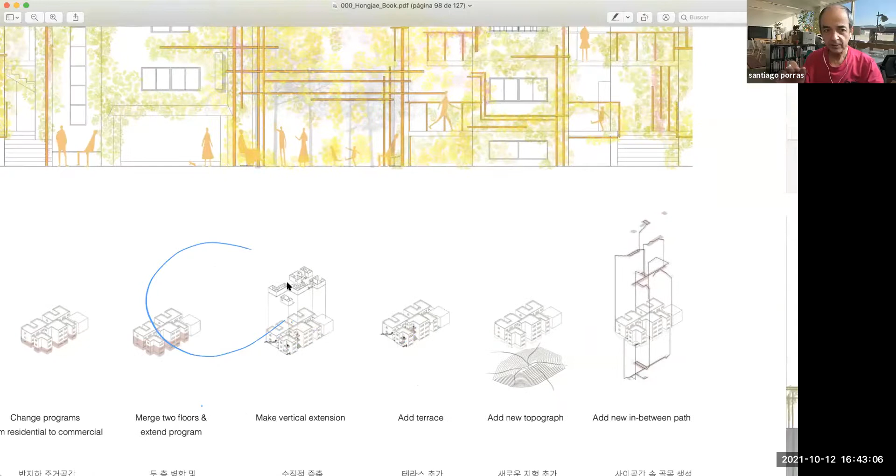So these are the strategies. It's very small, but actually it's about doing many of the things. You have the book yourself, so you could look at it. I think it's worth noting.

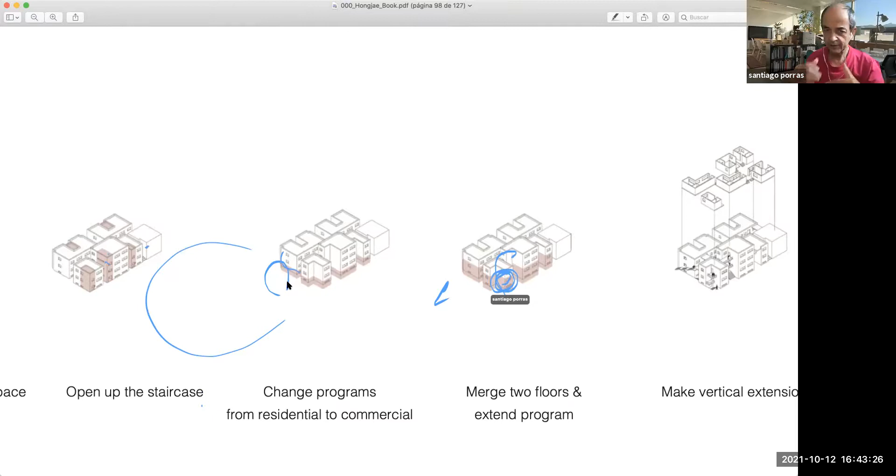Cleaning the space between the houses happened, opening staircases, adding programs on the lower floor, sometimes increasing the space for those common programs, and finally adding space vertically, so you compensate for those common spaces there.

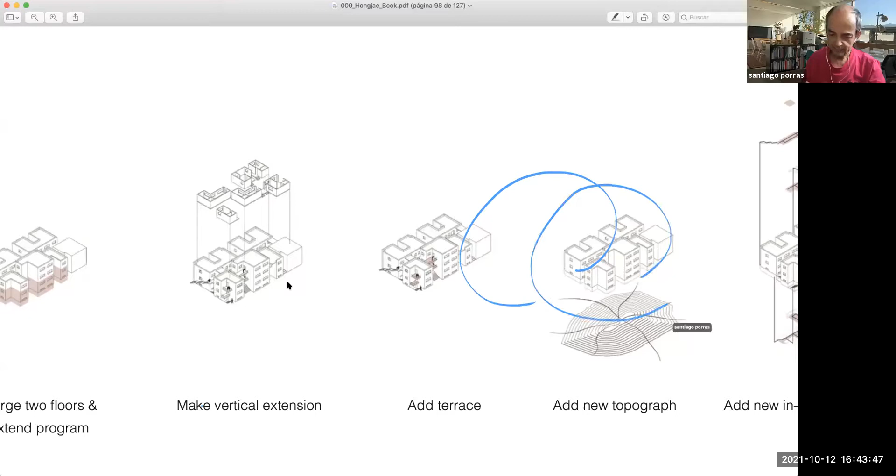And then including this kind of terraces with green, and finally the artificial topography, which was something not so easy to understand here. And finally, this metaphor of the gas lines were these kind of new connections and this new support for the green places. This is a very clear process.

Of course, you make those diagrams when you've already solved all the difficulties—you know how to do it, and you show the result. In the beginning it's much more diffuse, much more complicated. So if you try to do this from the beginning, you will always get it wrong, because they already tried, they tested, and they visualize only when they have, maybe not perfect, but the best solution they have for it. So be aware when you see finished things.

This is why I like to show you the midterm proposal, but this was not in my class, so I can only show you the final result.

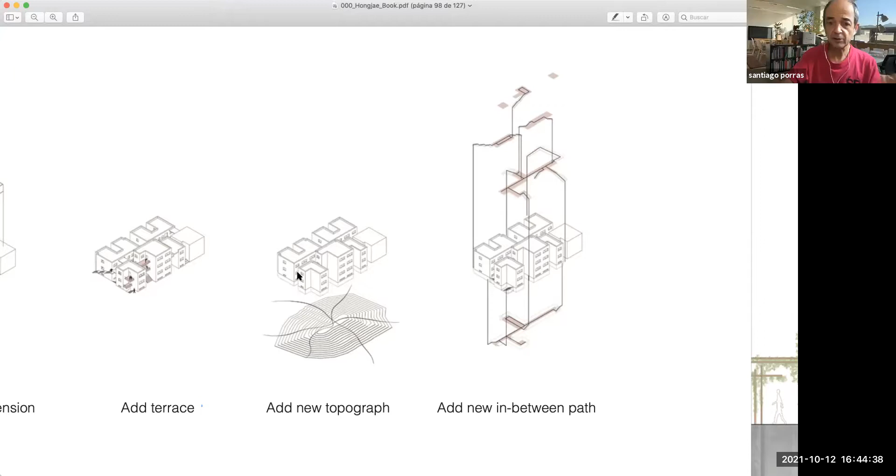Ginu, or Sonu, sorry, not Ginu, Sonu.

If the brick building is in good condition, you can use brick. It doesn't mean you have to remove it. Sometimes concrete buildings cannot stand anymore, and you have to remove them or reinforce them a lot. Sometimes it's the opposite: the brick buildings are totally useless and you have to just destroy them.

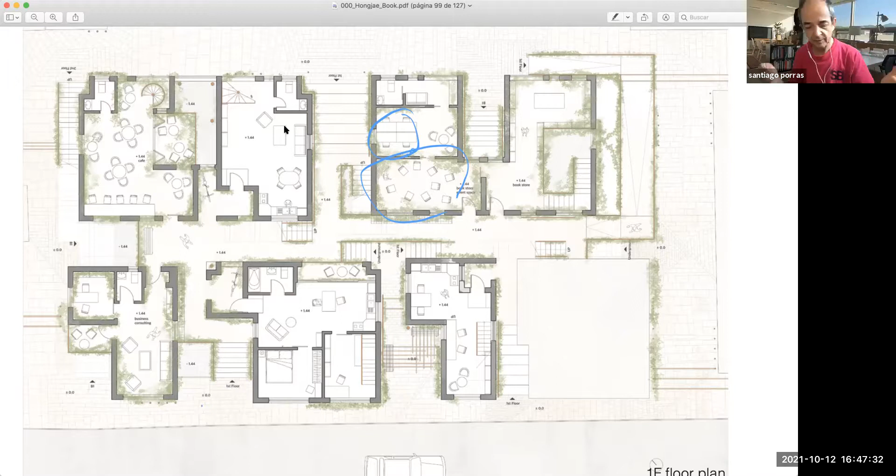Again, this is the final result. You see these are plans with standard furniture, standard things, but they don't have over-detailing, and they're not the usual spaces, and the sense of scale is quite good. So be careful with that. You have chairs and desks where you can sit, meeting spaces where 6 or 7 people can meet. Sometimes we have rooms where the sizes of furniture we cannot really use, but here everything is standard, and still it makes sense in terms of size and scale. I would change something, but okay, still things you can improve, but that's another matter.

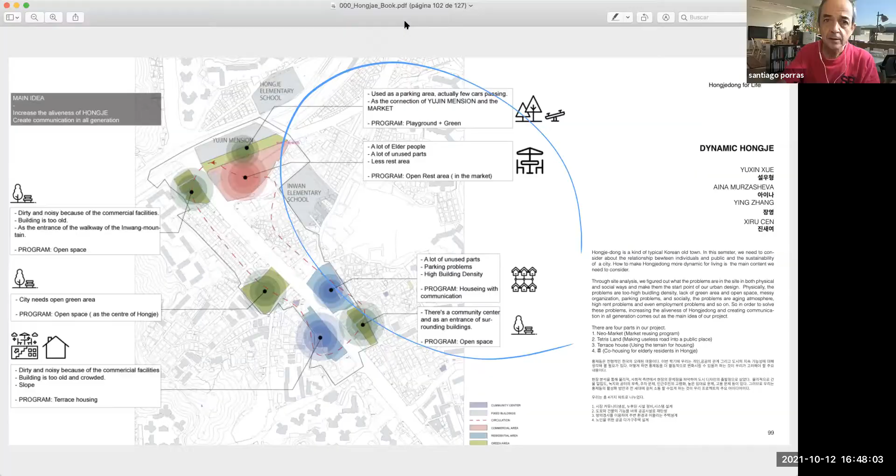Again, this is already another group. Yeah, there's another way to show the strategies, things you do as a group. This was a large group and they did work in many places giving strategies, but I will not show that. I just wanted to show you that it is possible to make a renovation of existing buildings without making a huge change in terms of destroying and rebuilding, but it's a huge change in terms of the result of a street and building. So we have a full range, from totally demolishing and making almost a new town, to almost touching nothing. And all of those are acceptable. And then you see also how things work in groups, and I think in that sense we clarified a lot.

Now I'm ready for questions. After I reply you will be free to go back to your drafting board or your computer and work like crazy, because for Friday I wish you'd try to start having an idea, a bit more defined, your typology, your prototype with the dimensions, and how you will work, which part of the site you will use, and how you will work on them with the specifics you have in each site. So for Friday it's mostly on your side to work. It's time to work back, or it's time to go back to battle. But I want questions. If difficult, better.

Professor, can I ask a question? Ask it. So in the lecture, you usually tell us not to put the bathroom facing the living room, but in the case you showed us, even the most completed project, we can see the bathroom facing the living room. You mean the one we saw, Yunjeon? Yeah, even Yunjeon. Because this was the only finished project we saw, all others were in process, right? All other projects were midterm, so they were in process. So the word completed means the quality of the work. So even with that quality of work, we can see kind of a misorganization. So is it okay, so we don't need to think more about that organization?